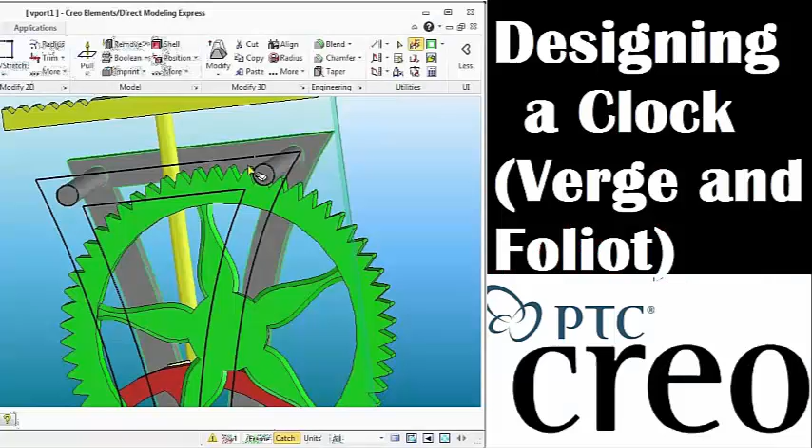What we're going to do is continue on with this Verge and Foliot clock. The first thing that we need to do here is create a new part, and we're going to basically start working on the escapement.

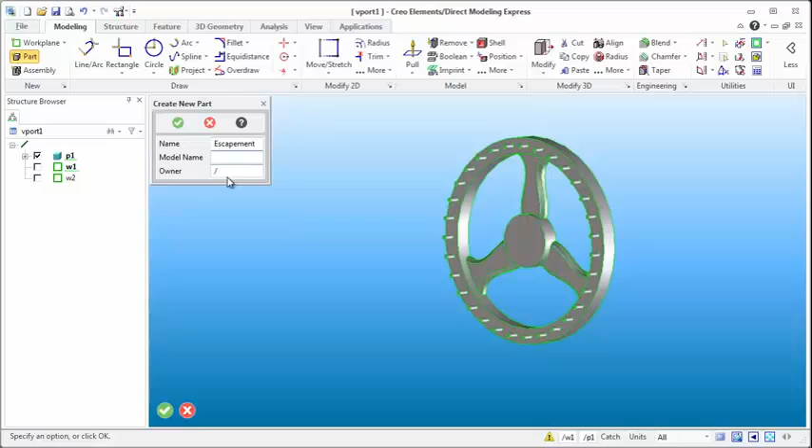So what we're going to call this one is... and if I'm spelling that wrong, that's the way I roll, because I like to be considered a designer and not a speller. So that's not a big issue of mine.

One of the first things that we need to do is take a look at that first work plane that I used to create the actual crown gear, and then this to create the pin.

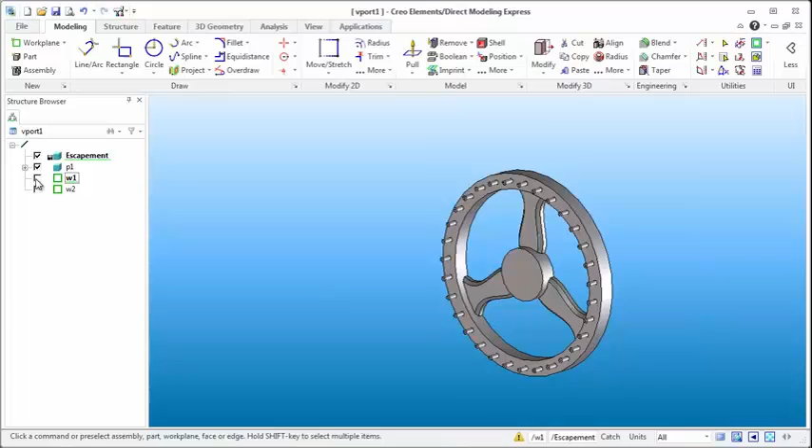So what I want to do is create a plane that is at 90 degrees to this one here. And how we're going to do that is you can come up here and click on this and say create a new plane on an axis and that sort of stuff. But if you come into structure, you'll notice you have a few more options here.

One thing I find kind of interesting is that you can take a work plane and actually start modifying it as far as its position and everything goes. In this case, you can rotate it 90 degrees and all that sort of stuff.

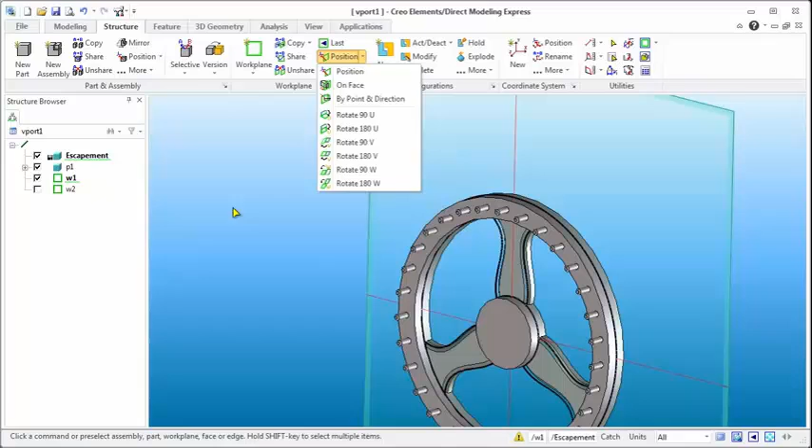So the first thing I'm going to do here is actually create a copy of the work plane, just a complete copy, and we're going to turn the other one off so we can't see it. Now you'll notice that the sketch is still there.

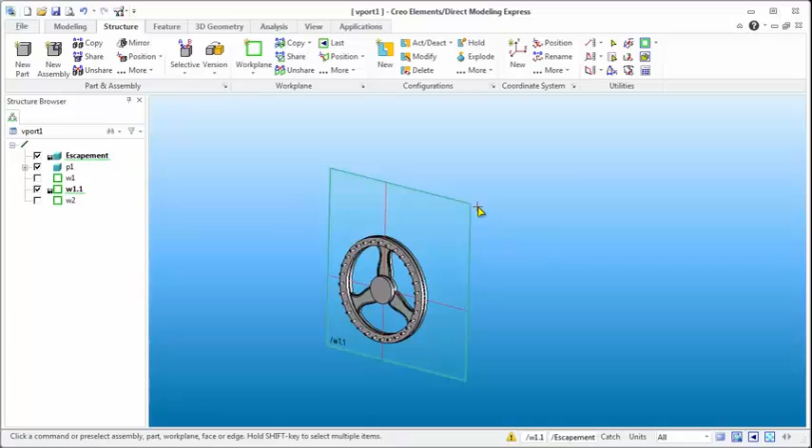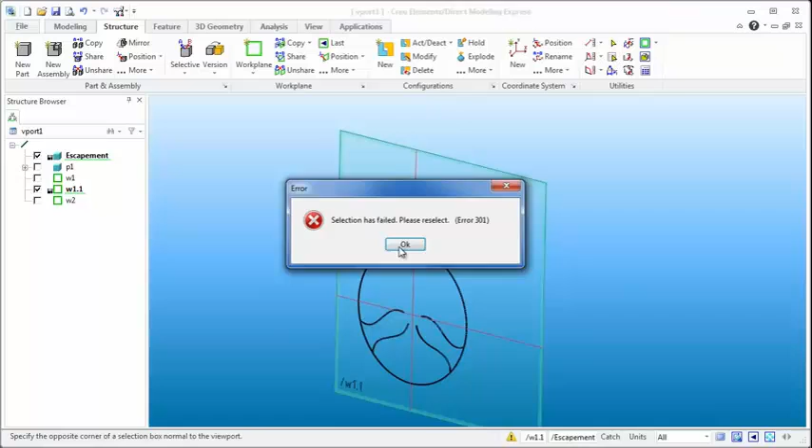So one of the things I'm going to do here is zoom out and select everything. Oops, that's not exactly what I want to do. I want to select on that sketch, and we'll just start deleting out these elements. One thing we can do here with part one, instead of fighting with the selection issues, is just get rid of all that stuff and start selecting things this way.

So now we have everything set up with that work plane with no sketch on it. Yes, it was a bit of a workaround that probably wasn't necessary, but that's the way things go.

One thing I am going to do here, though, is come into this P1 and let's call this the crown. You can notice that if I double click slowly, just like if I click there, click a second time, and pause, it allows me to rename these things.

So what I'm going to do is, just to keep things organized in my mind, it's usually good to label things properly with some verbiage that you understand. You can see that name was not allowed, and I think the biggest issue was simply that I had created the wrong text that you'd be able to use in here.

So we'll do W1. We'll use camel case in this thing, and when I say camel case, that means the C is capitalized, so is the S, but there is no space in between them, so that way we know what items actually belong to each other.

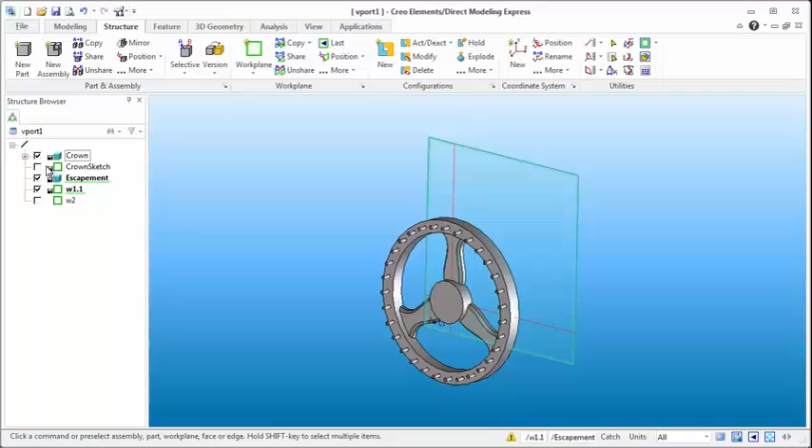Now we're back to this guy here. We've got the escapement as the current item that is live, or the part of the model that I am working on that is live.

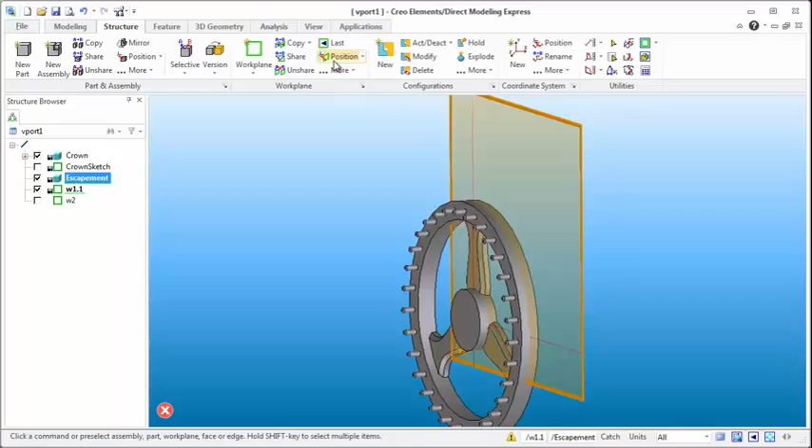So what we need to do here is take this plane and reposition it. So let's go into here, and I want to rotate along 90 degrees along the U-axis. I believe it is the V-axis.

No, that's not the one I wanted, so Control Z. So it turns out that the U-axis is the one that I did want. And what it is using for the axis is this crosshairs that I had already placed on there, and it's going from the 0, 0 point.

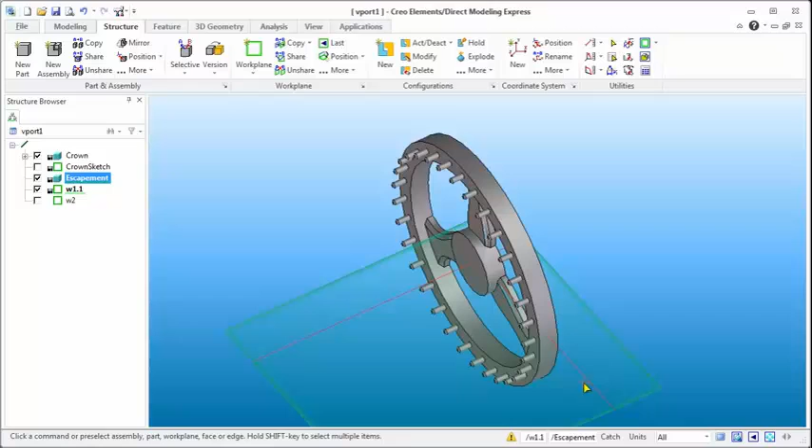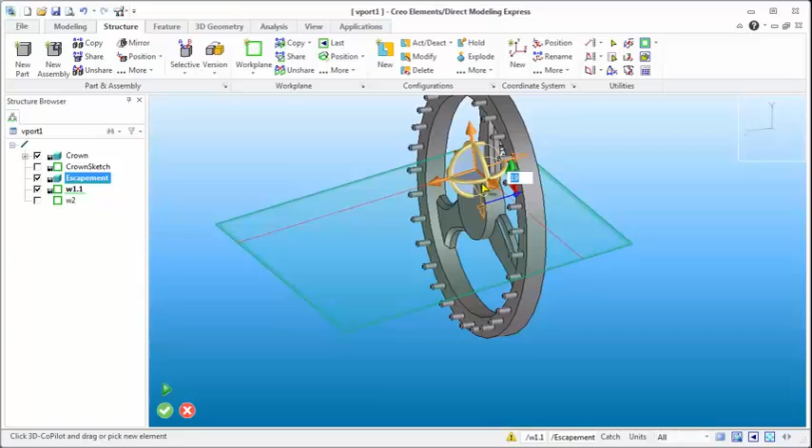Now you remember when I started the crown wheel, I started with it at 0,0, so that makes it easy for the plane to determine which way it needs to rotate. However, one thing some people don't know is that you can come up here to position work plane, manually rotate it so many degrees and pull it up. You can place planes where you need them, and all these distances and angles are fully capable of taking text input.

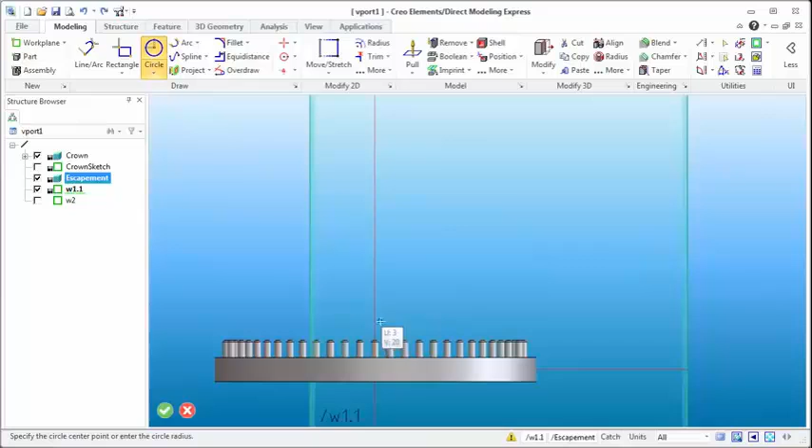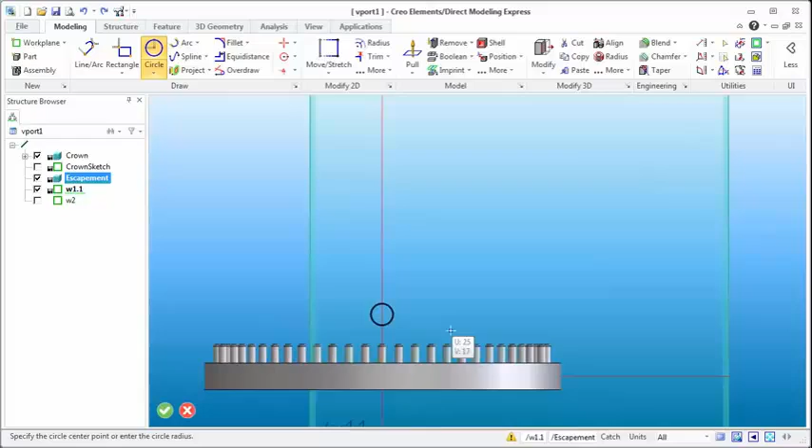Let's go back, and now let's go to a top view like this one. Now I want to start another sketch on this plane, and I want it on that crosshairs. If I press the shift key, it'll snap if it isn't set up to do so already. So I'm just going to guess here, and a radius of 4 seems okay. So now we have a circle that we can use for the shaft for the escapement.

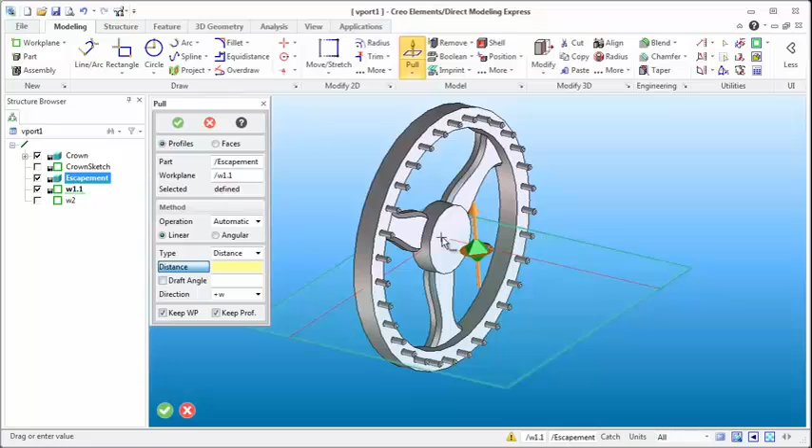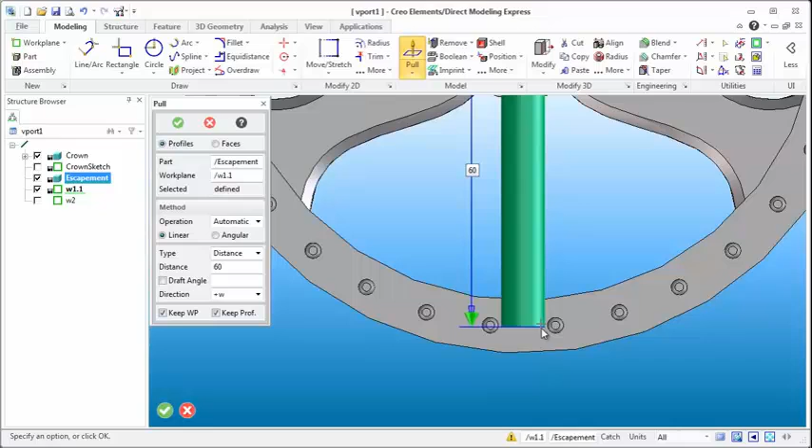From this it's a simple pull. Now there are a couple things you can do to make your life easy when creating planes. Planes are what a lot of people use to start creating geometry, when you might not have a face to use. I had set everything up so that 65 was the outside diameter of this circle. Let's go to a view I like to see. And 60 strikes me as what I had for the radius of the pins, the outside circle of the pins, so that gives me a spot to start with. Let's exit out of that.

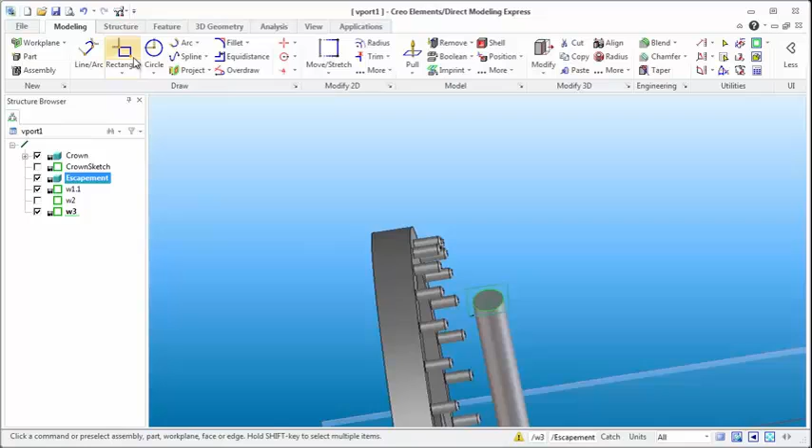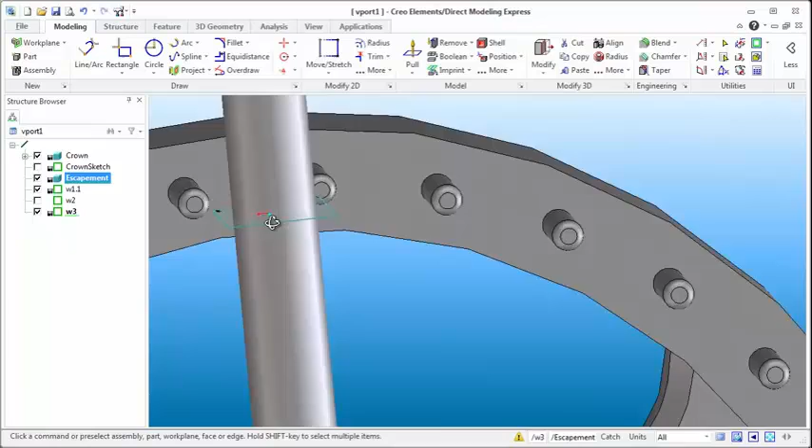This isn't how long I actually want that shaft to be. So what this has allowed me to do is create a work plane on the face. We'll put the work plane right on the face, and that's great. But now I can also continue the face on as long as I want it to be. So in a couple steps I managed to quickly place a plane where I needed it, so I can start creating the geometry for the escapement pawls or arms.

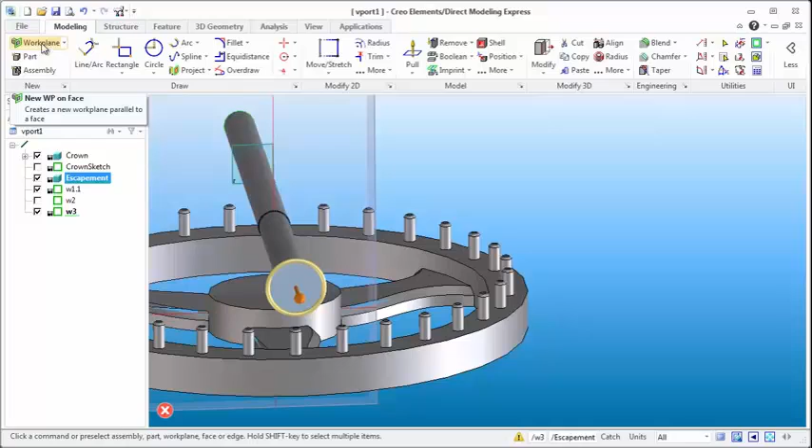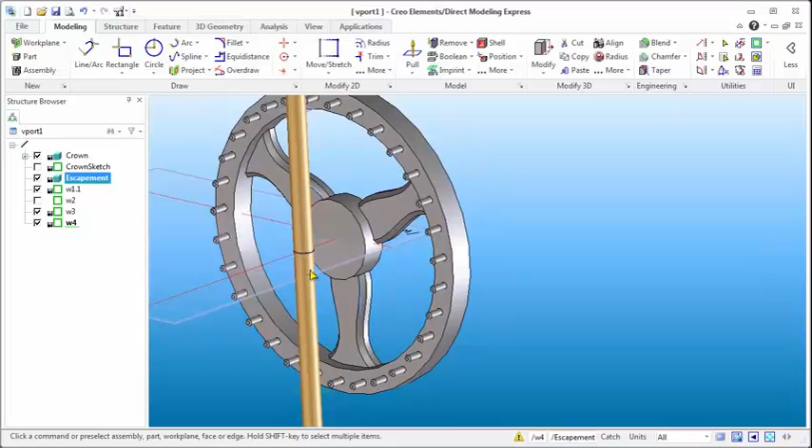We're going to do the exact same thing coming out from the bottom here. Again, the radius I used was 60, so let's pull this out to 60. We'll hit the middle mouse button to say OK. Then we'll click on that face and come up here, and you'll notice the work plane icon is defaulted to the last one I used. So I'll create another work plane right there, say that's okay, and continue pulling this out. I'm not too concerned about how long the ends are, because from here I can come in and change the length of the shaft. The other thing is the chances of me needing this circle are pretty small.

Now let's see, was it that plane? It wasn't that work plane. I don't see that one being very useful. What work plane is that one? Here's the circle, so I can turn it off, but at the same time I kind of need to know what it's for. So what I recommend everybody does is start naming all these planes and sketches and anything else you do, so that you know what it's for.

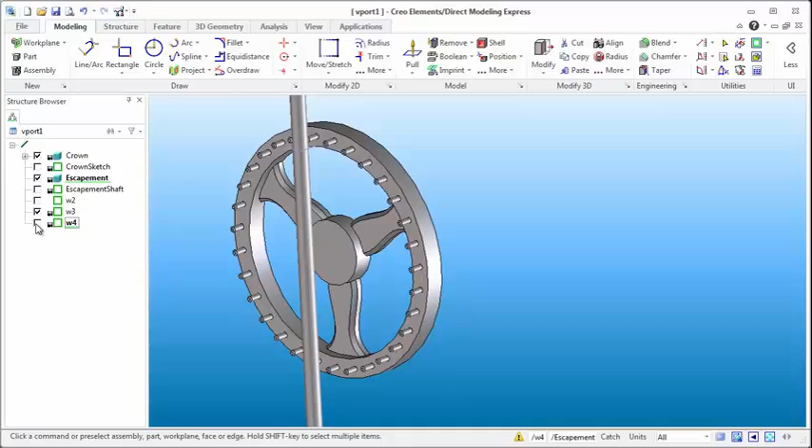Now the work plane 2, let's see, 3 turns off this guy up here, and 4 is something that I want to have. Now work plane 2 doesn't look like it's going to be anything that I really need to use, but I believe that's the crown pin, so we'll call it the crown pin, and we can hide it. So now we know where some of these sketches and planes belong.

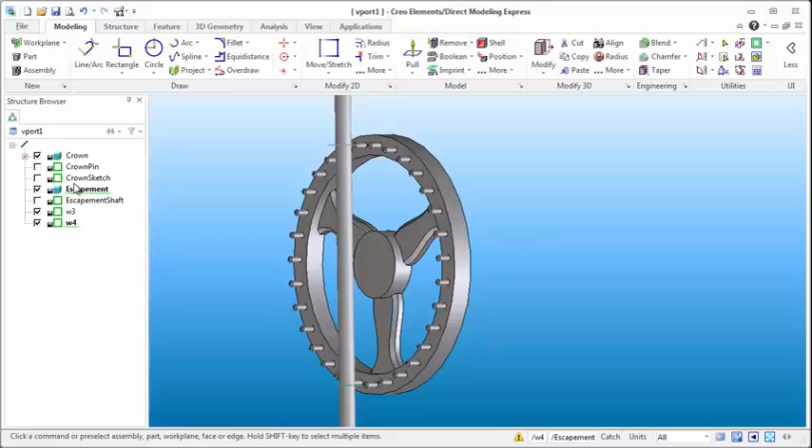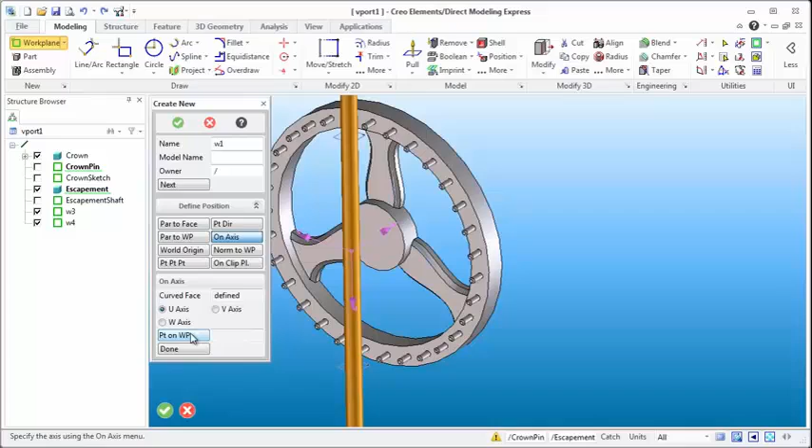Now what we're going to do here is I'm going to show you a real quick way that you can start playing with planes and actually have them do some pretty interesting things. So click on a new plane, and in this case I want a new plane on the axis, but the axis I want it to be is on this shaft. I'm just going to accept the defaults. You can change where you want the U, V, and W axes, but we'll just accept the defaults, and that worked out quite well as far as the plane goes.

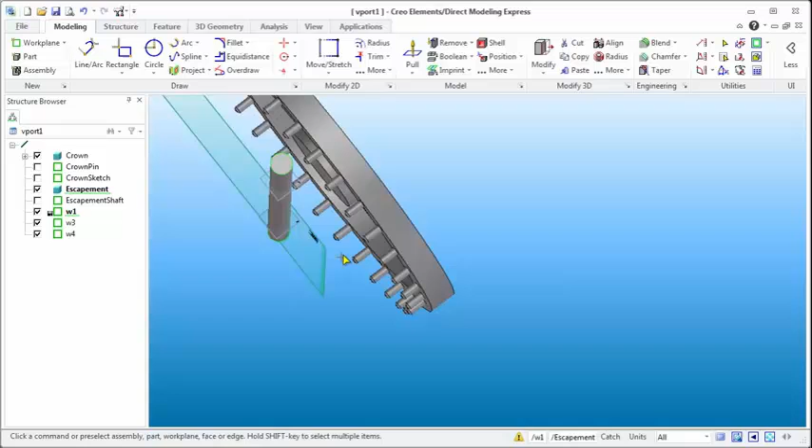But the one problem I have here is that I need to have sort of a flat tab come out at this direction, about 45 degrees, and another one to come out at 45 degrees at the bottom, just so we can create these little tabs that click on these pins.

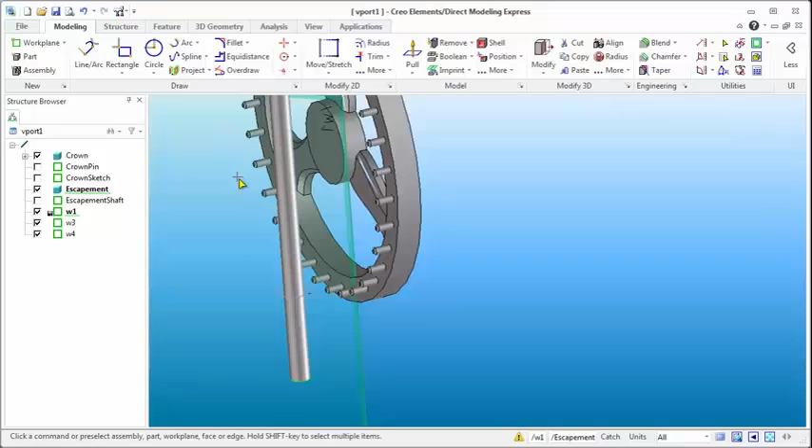So what we're going to do in this case is I'm going to grab onto that plane, and you'll notice that it brings up this avatar here that allows us to start rotating it. So I'm going to hit there, click in here, and go 45 degrees is what I want. And we're going to say okay, and then suddenly I've got this plane that is at 45 degrees, exactly what I want. So at this point, let's just start sketching on it.

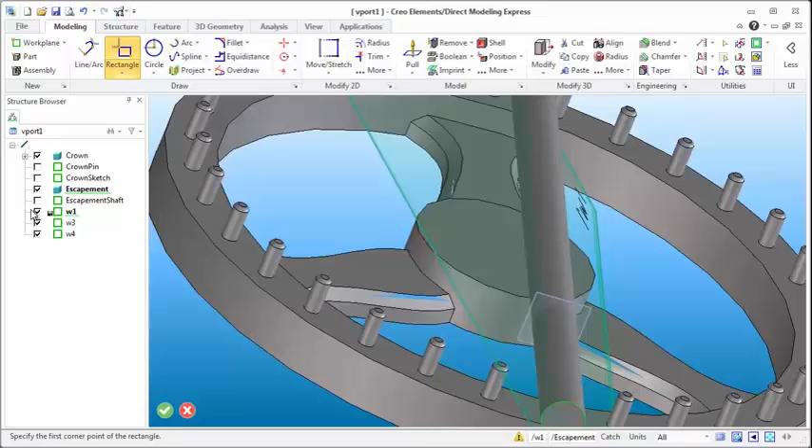It wasn't necessarily the edge or the way I would like to view things, but I'm just going to create a quick sketch of a rectangle. Now you can't see that because this shaft is actually here, so we can get rid of that shaft really quickly just so we can see that sketch and realize that it's a little on the big side here.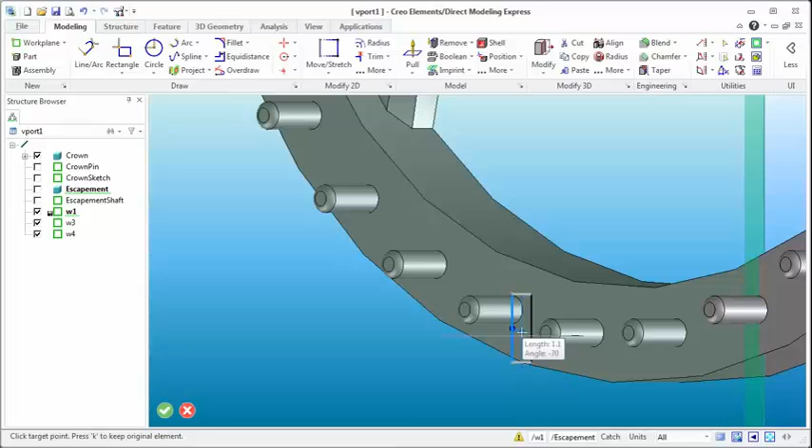So what I'm going to do is organize my view a little bit, use the arrow keys. You'll notice we'll rotate the view about 45 degrees, so that can be pretty handy at times. And I'm just going to grab that part of the sketch, we'll move it down, and we're kind of doing everything here by golly. And that looks pretty good for me for right now.

So let's bring back this escapement, which we happen to be working on, and I know I'm working on it because it is green. And I'm going to do a pull, but in this case, if I start doing a pull, it'll probably automatically assume that since it's in the middle, it's going to cut. So I want to add material, and we're going to drag that along here.

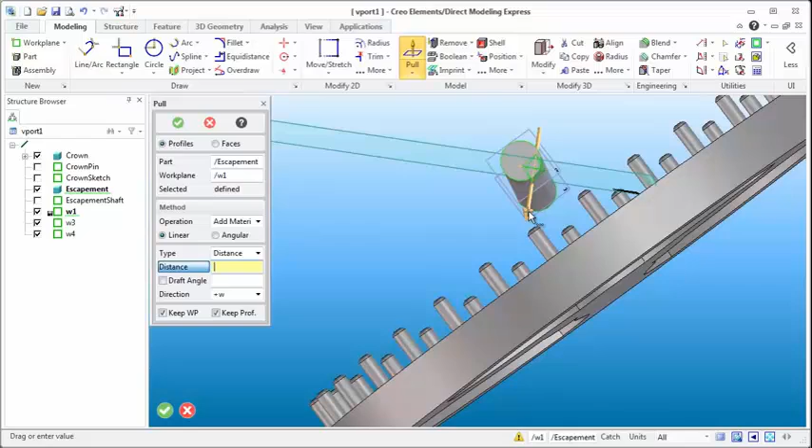So let's just go to just a little past here, so that it looks like it would just be leaving the pin if the pin had just hit it, and rotating another one through. And we'll say that that's okay.

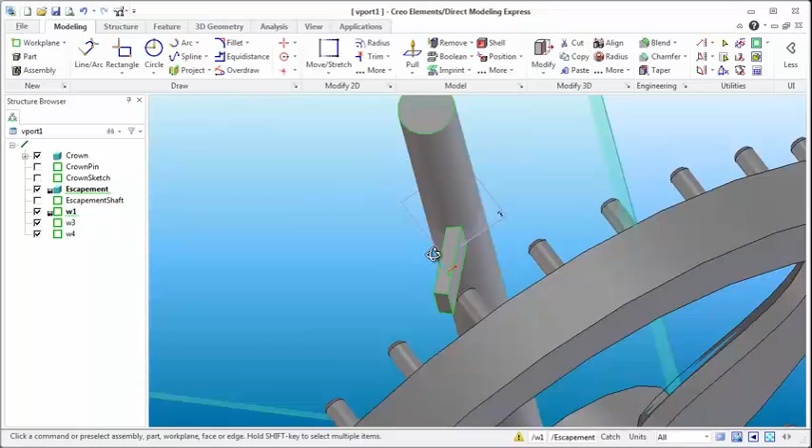Now there's a problem with this. You can see that we're offset from the shaft center, and I don't want that to happen. So let's Control Z. Let's go back a little ways here. And how do we find the shaft center in this case? Well, I think one of the best ways we could probably do that is that we will create my favorite, which is Infinite Construction Cross.

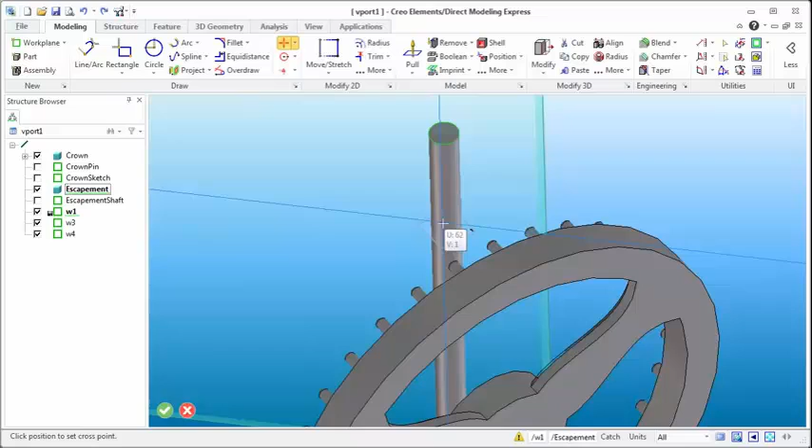And I will find a spot. If you notice as I'm mousing over here, it'll allow me to get right at that center point of that shaft. So now we've got some construction geometry that we can work with.

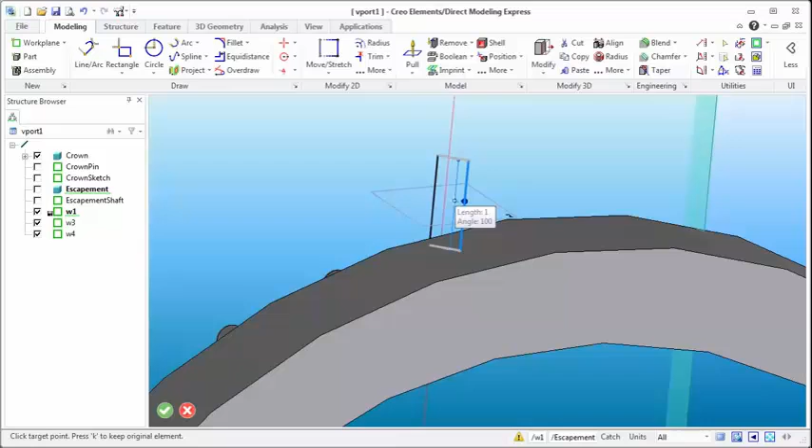Now if I hide this and start working with this sketch, I can start moving the sketch around so that I've got things lined up the way I want them to be. I'm doing a lot of this stuff really kind of dirty just to get the point across as far as how to model some things up here. You can be a lot more precise if you take the time.

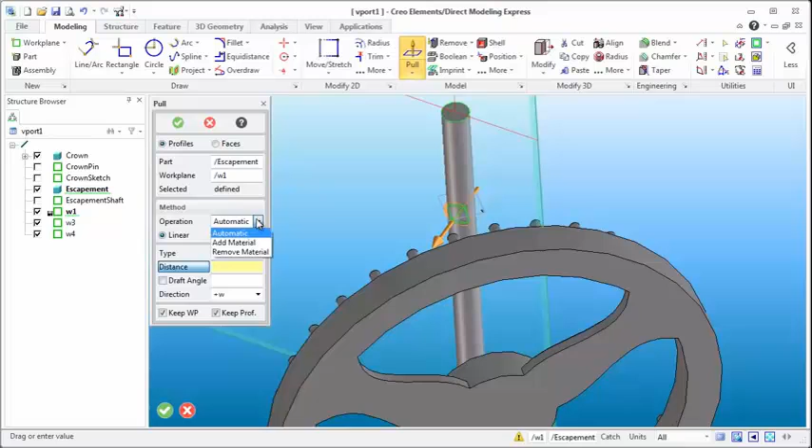So again, we're going to show this guy, and we're going to pull, and we want to make sure that we are adding material, and we're going to pull him out, and you'll notice that he is lined up here pretty good. 17, let's go to 15. Not 25, 15. Yeah, it should look pretty good. And I've added that little boss that I needed.

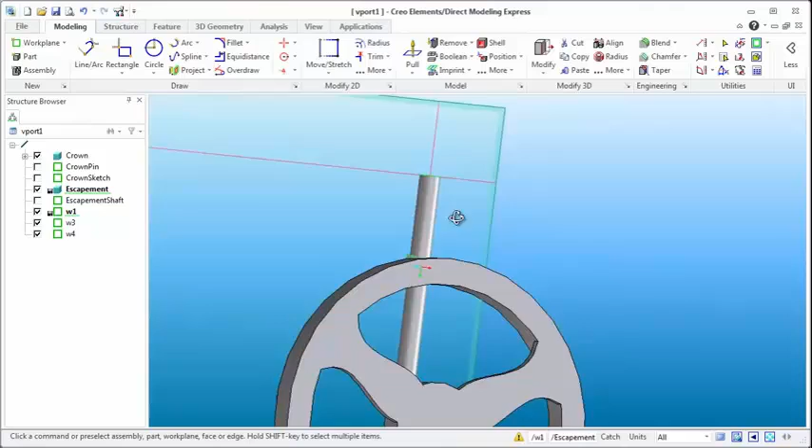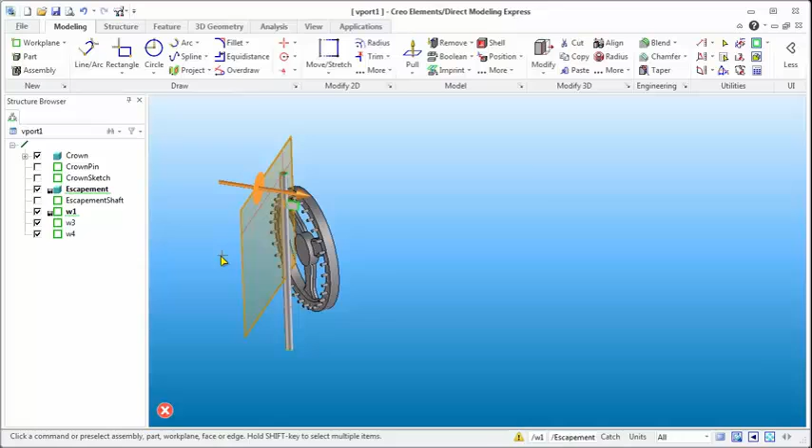Now, what we're going to do here is a little thing that I started wondering if I could do earlier, and it turned out that I could, and it was quite handy. So we've got that sketch already on this plane, right? Now we also know that it is 60 for the radius from here to the pin. So I need to basically move that sketch down 120, and I need to rotate it 90 degrees. Well, you can do that because you've got the access to the plane.

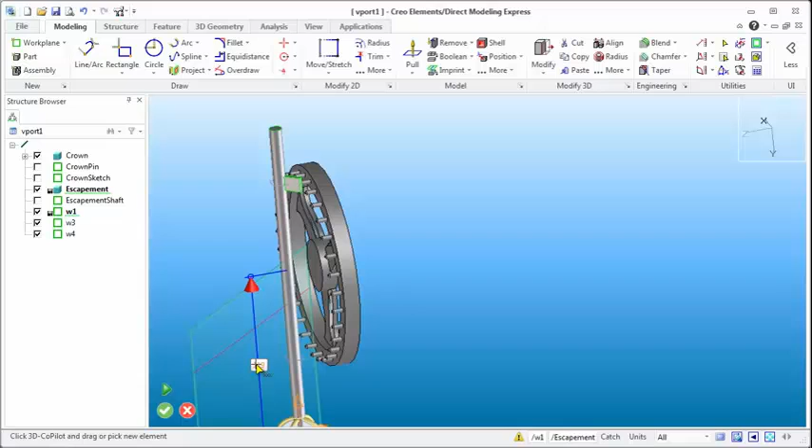Let me escape out of this, and we're going to click on the plane, and we're going to move the plane around. So first thing we need to do is that we know that I want to drop this 120. You can type these in if you want. And I also know that I want to rotate it 90 degrees this direction. Let's just type that in, 90. And we'll hit the middle mouse button, and we'll say that that's okay.

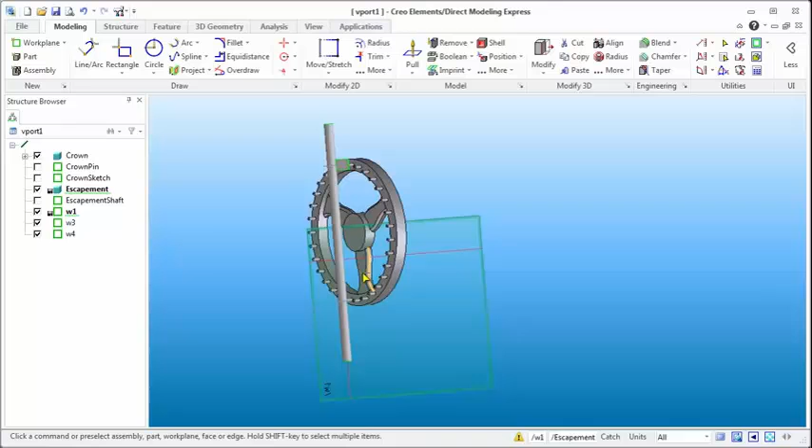Now what has happened here is that you'll notice that I moved that sketch down that I had already created for that one pin. I moved it down the amount that I needed to, so I didn't have to recreate the sketch, and I also didn't have to do a whole bunch of patterning. Then I rotated the plane, and it gave me what I wanted. So now I can use that geometry that I already used before in a different location.

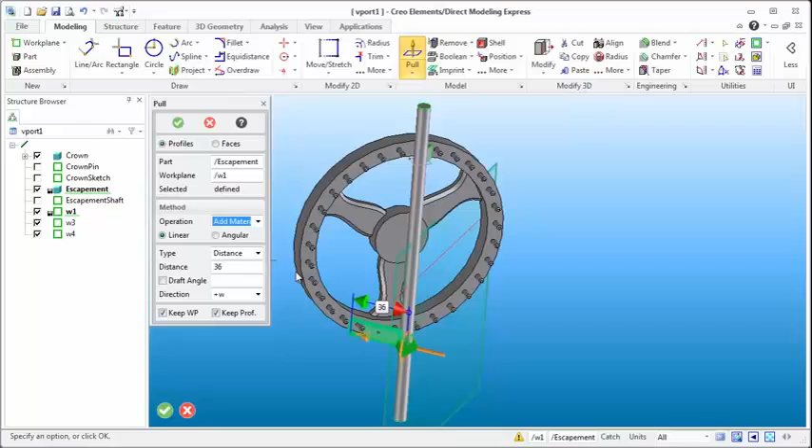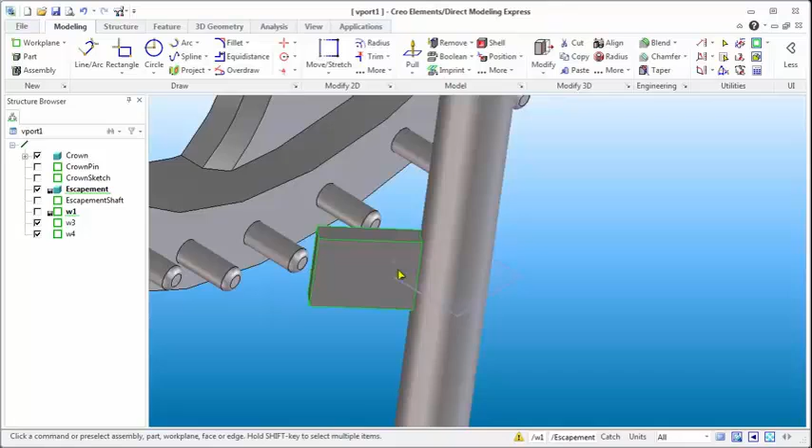Again, operation, we want to add material, and I want this to be 36 like I did before, and we'll say okay. At this point I can start hiding the planes, and I've got all this geometry that I needed. Really quickly I found out that I can rotate the plane with the sketch, have that geometry go where I need it to, or at least that sketch go where I need it to, and then reuse it. So that's a very handy little feature, being able to manipulate the sketch and push it around to different spots that you need to.

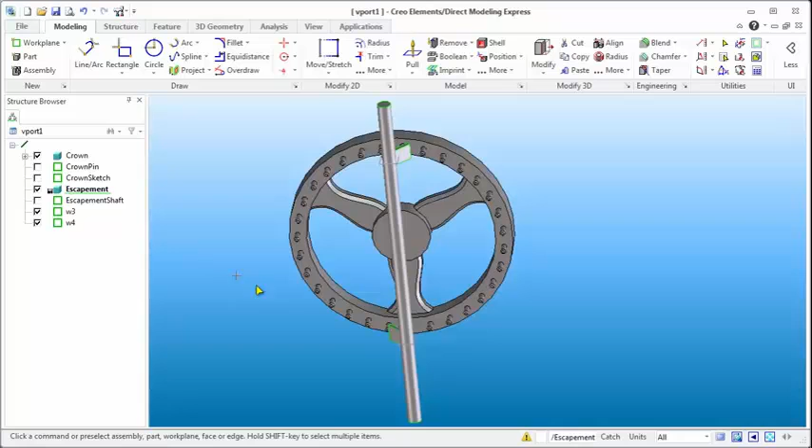At this point, I don't feel that we really need to have this sketch around here. So what I can do is I can just right click and delete that, so I don't have any of this confusing stuff. I'm still going to keep these two planes here just so I have an idea about where I need to be in space as far as these pawls go.

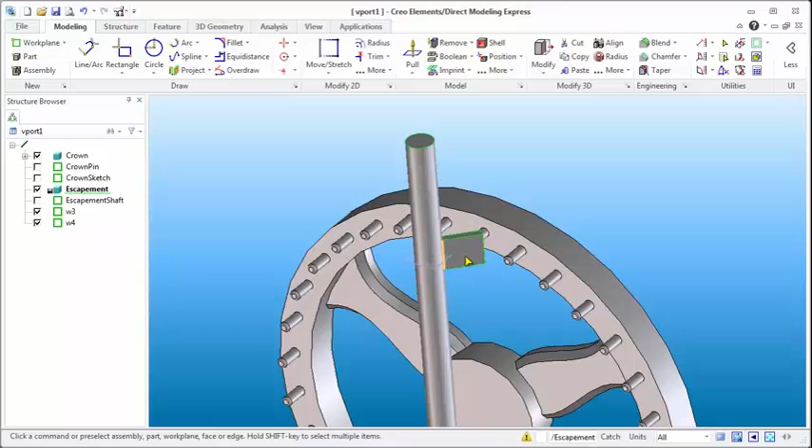Hopefully that's helped you out. It showed you some of the abilities of using planes to start putting sketches and other reference geometry into your model very quickly, and also being able to move a sketch around and take some of the geometry that you have in the sketch and reuse it in different locations on the model.